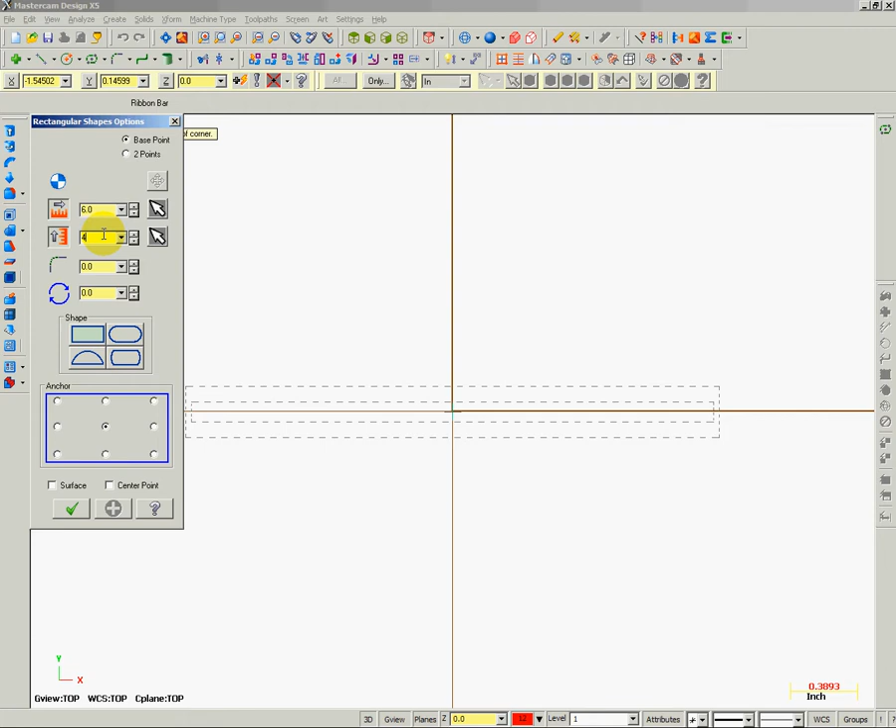To do that, I'm going to go down to Create Rectangular Shapes, this little icon here. It pulls up these features and says select a position or base point. It's going to be the center right there, but I want it to be the center of my rectangle, and I want to set it to be 6 inches wide by 4 inches tall. I can say OK.

Now we can't see it because it's off the screen, so I come up here to fit to screen. Now you can see it in red, my rectangle.

Okay, from here I am going to shift to isometric view. There we go. And I'm going to zoom out a little bit with my scroll on the mouse, the center button. Alright, so there we are.

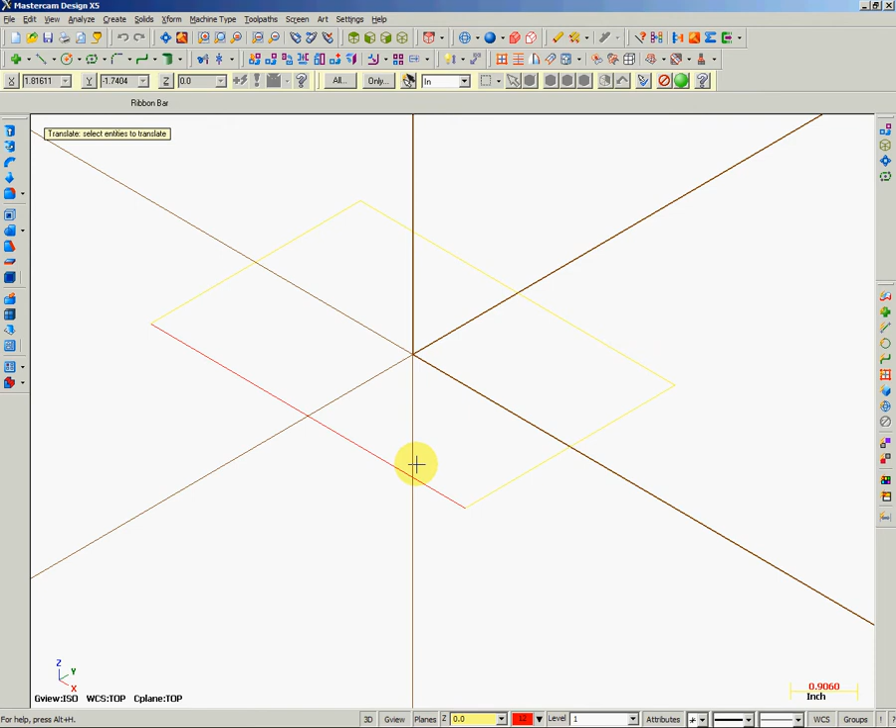Now I'm going to move this down 2 times so I can get some extra spots to create a surface. So to do that, I'm going to go Xform, Translate, select what I want to translate. I'll have to go select all the sides, or window it, whatever would work, end selection.

Now this screen pops up, and I want to copy it, but I want 2 of them. And I'm going to make them go down 1/4 of an inch. Okay, you can see the 2 showing up there. That's what I want. I can say OK.

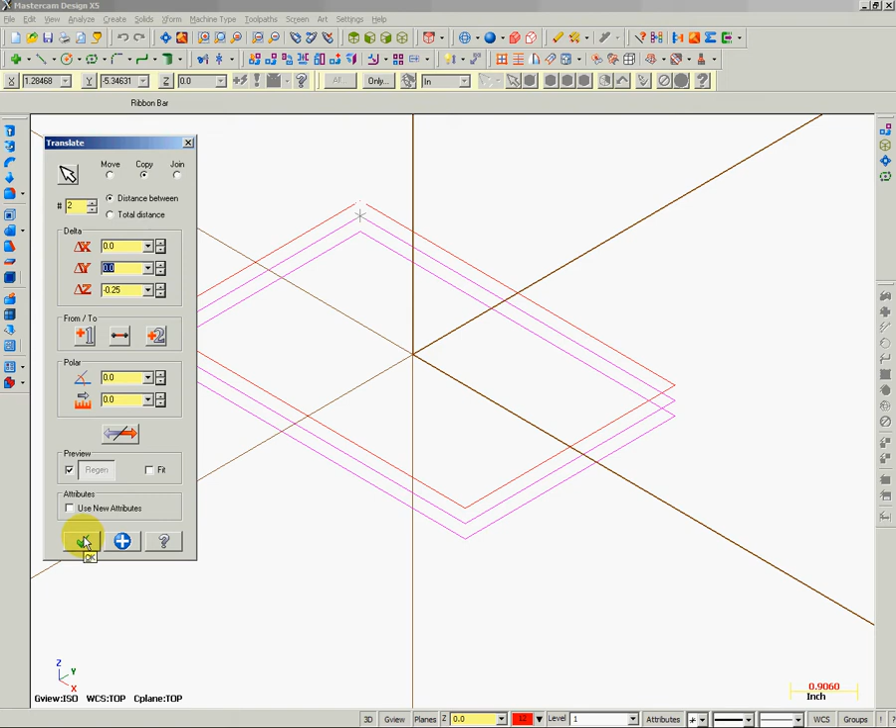Now, if you look at these, we'll shift to dynamic rotation. You can see that they're below the z-axis now. One of them's 1/4 inch, one of them's 1/2 inch.

Alright, so the next thing I'm going to do, so I can create a surface, is just make points along each of these lines. So I'll go Create, Point, and then Segment. Under Segment we have a couple of options. We can give it a distance, or how many we want across each line.

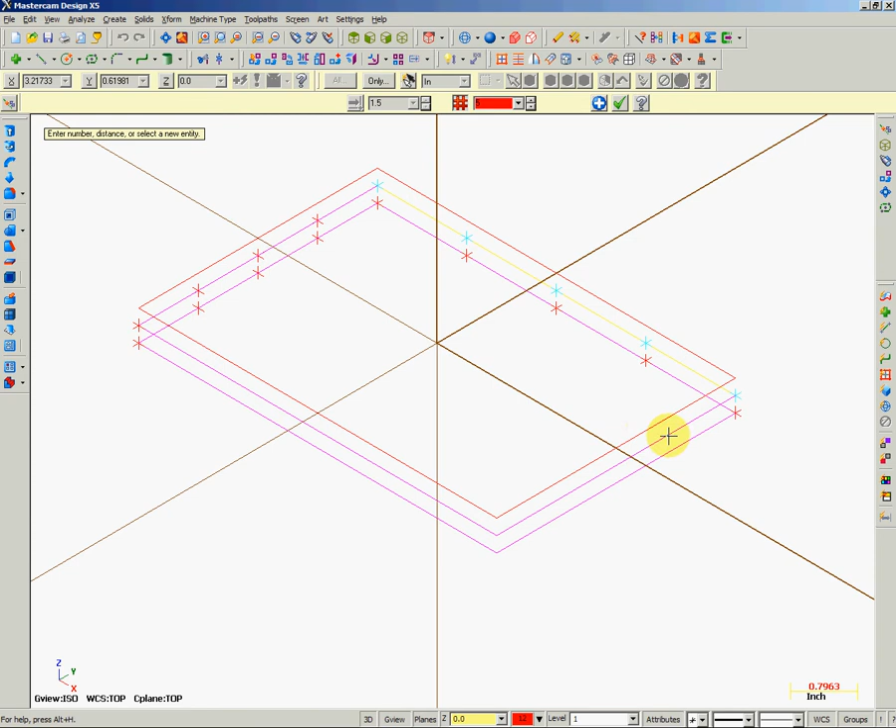I'm going to choose 5, and then if I push this little cursor button, it turns red and locks that in place. So I come here and I can click, and it automatically will put 5 on each line. If you don't have it locked in, it'll ask you the numbers every time. All of them are there. I'll say OK.

Next I will start with a diagonal line across each level, basically each level, so that I have a center point of each of these surfaces. So I'm going to go with the lower rectangle, make a diagonal this way, and I'm going to go with the upper one, or the middle rectangle, and put the diagonal the other way so I can actually see it.

We'll say OK. Now I'm going to create - basically our surface is going to look like it's going to be raised in the middle, but come down flat with all the edges. Maybe like a little jewelry box lid. So let's try that out.

So I'm going to create - I don't even have to click create. We can go spline, create spline, manual. I'm going to start with the middle point here. Then I want to go up to the midpoint of this line. To do that I can come up with this little button here and change it to midpoint and select the line. It's the midpoint, and then down to this line. And say OK. Now I could have made this without even dealing with these points, and in another section I'll show how to make a wavy surface with these points.

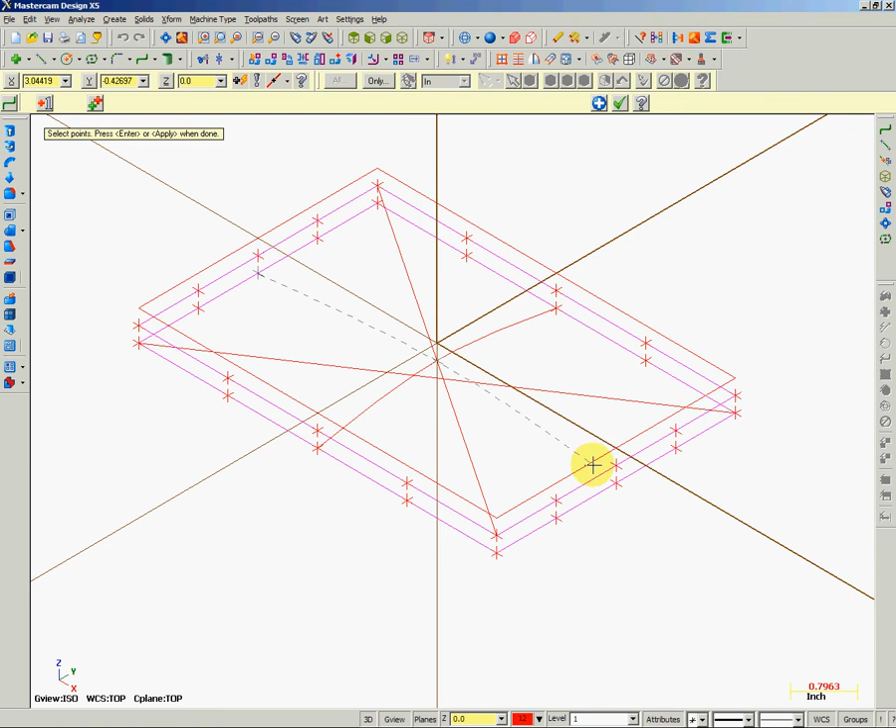Alright, so let's go ahead and create the other cross section here. So create, spline, manual spline. Once again you could have just pushed the button. Middle point there, and I can say midpoint. Click on the midpoint of this, that medium layer, and then down to the bottom. And check for OK. Now we'll go dynamic rotation and see - you can kind of see it there, it's kind of bubbled up in the middle.

Alright, so now we will go ahead and create the surface. So we go Create, Surface, and we can do a net surface.

Now the first thing it asks for is the along. Now I know it's longer in this direction, so I'm going to go partial and say along there, end, along there, end, and there, end.

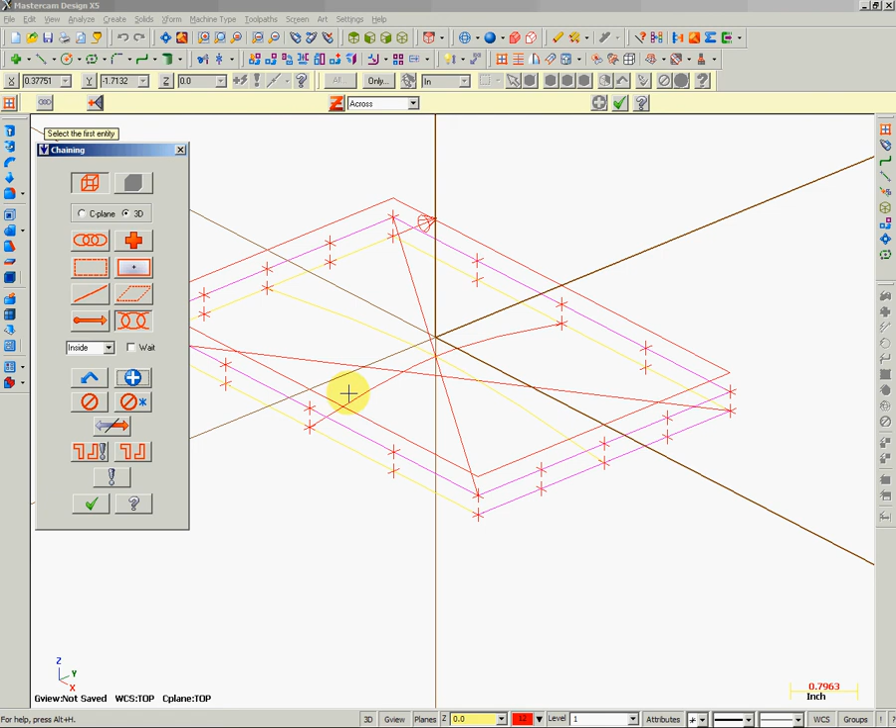Now I'm going to come up here and say across, and go across, and across, and across. We'll say OK and see what is created.

Now you can see the little blue lines that go across. It's showing kind of a crosshatch, cross section, maybe a wireframe. Now you can see it there.

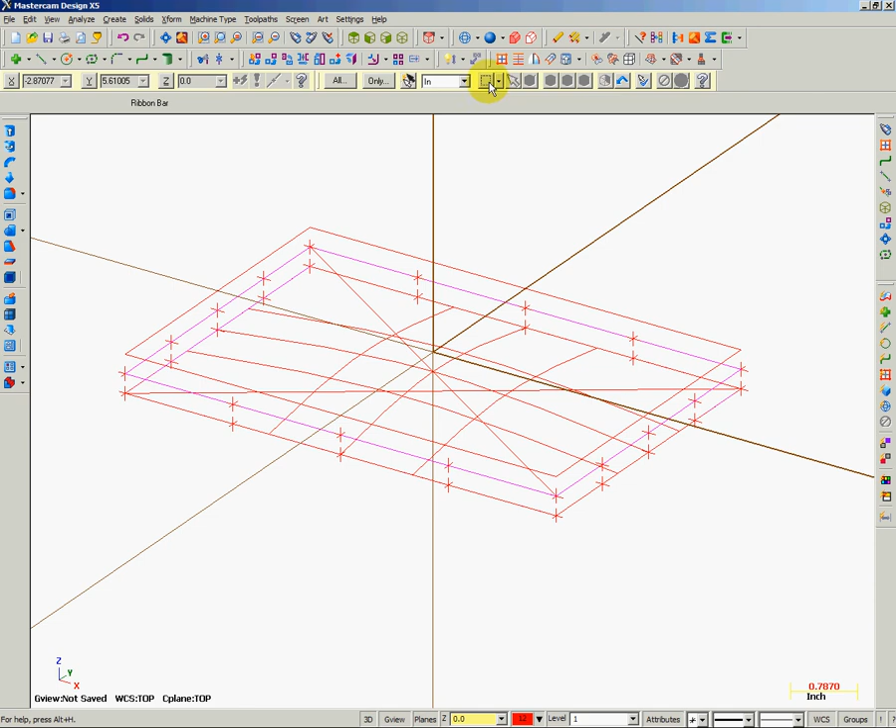I'll stop the rotation. Now one thing that we can do is we can come up and change it to a shaded dynamic again, and you can see that it's actually raised up. Or you can shade and unshade. You can do the same thing with Alt-S, toggles it on and off. So now we've created a simple surface.